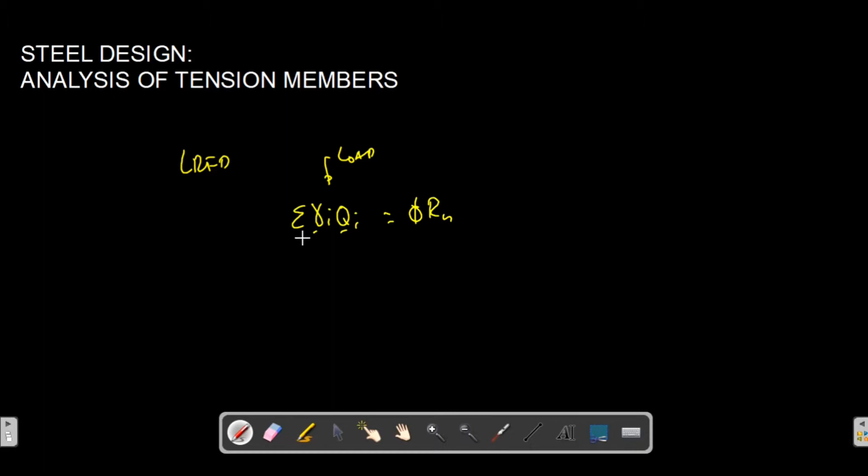This is the strength part for the structural steel member. Here we have a resistance factor and the nominal strength. Since tension is an axial force usually denoted with P, our concern in this lecture on analysis of tension members is this strength part, specifically the nominal strength part, and the symbol we'll use for tension strength now is Pn.

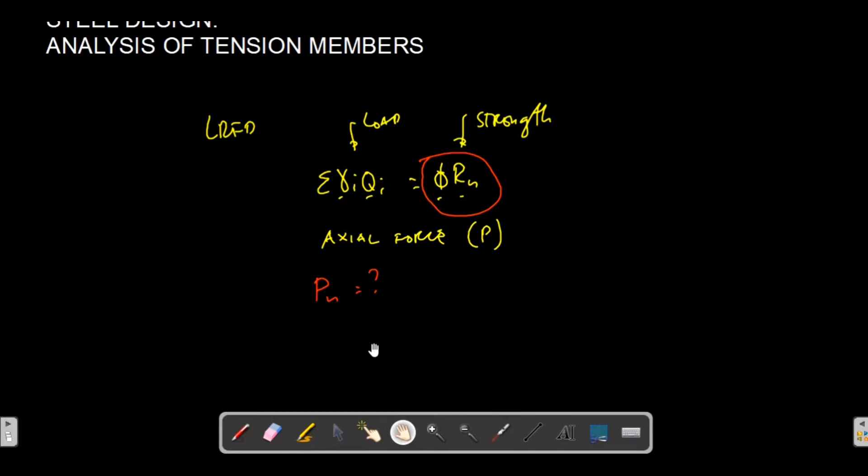So this is our concern now - we want to know the strength of our structural member, which in this case is a tension member made of steel. We have two criteria to determine the actual strength of a structural member.

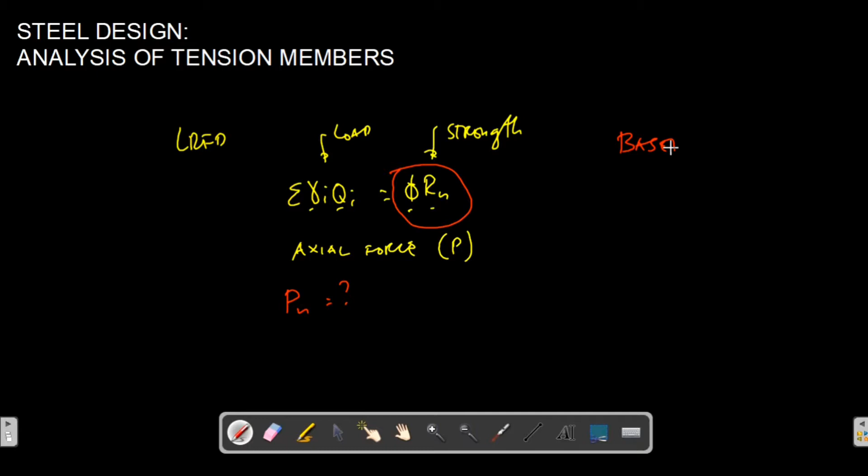First, based on the gross area Ag. Our equation here is: Pn equals resistance factor times Fy times Ag. This is our equation when we use gross area.

The resistance factor here is equal to 0.90. Fy is the yield strength, and Ag is the gross cross-sectional area. We already know about gross area - we discussed that in our previous lecture.

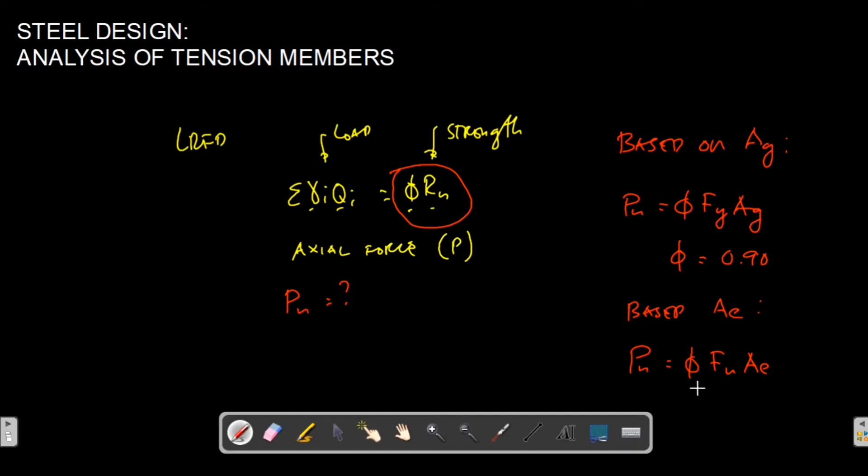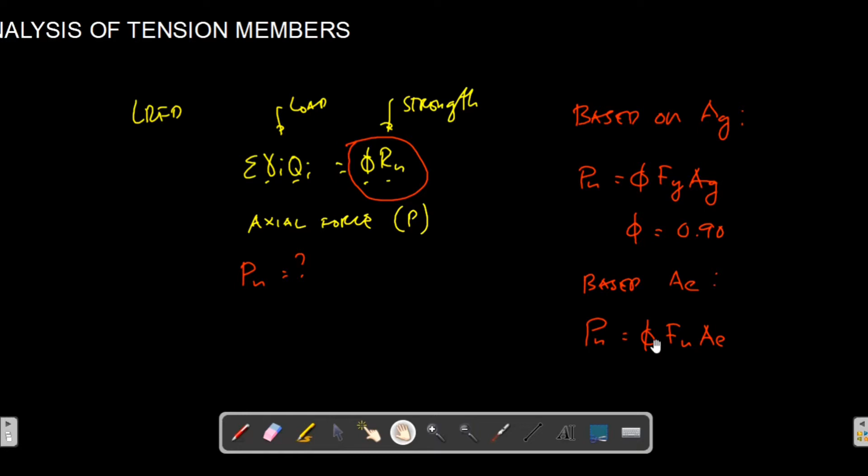So there's a range, and we use the minimum. The resistance factor for the effective net area criterion is equal to 0.75. These are the things we need to remember.

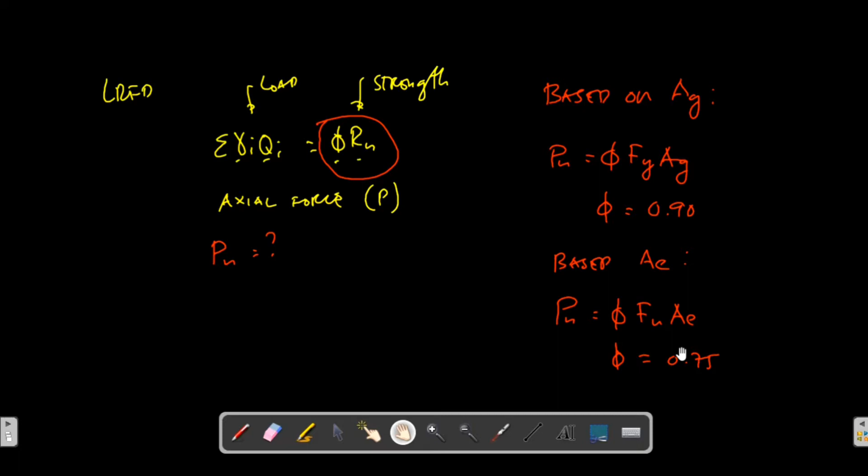We have a sample problem: Determine the tensile strength of a W10 by 49 in A36 steel if the two flanges and the web are all welded to the supporting member.

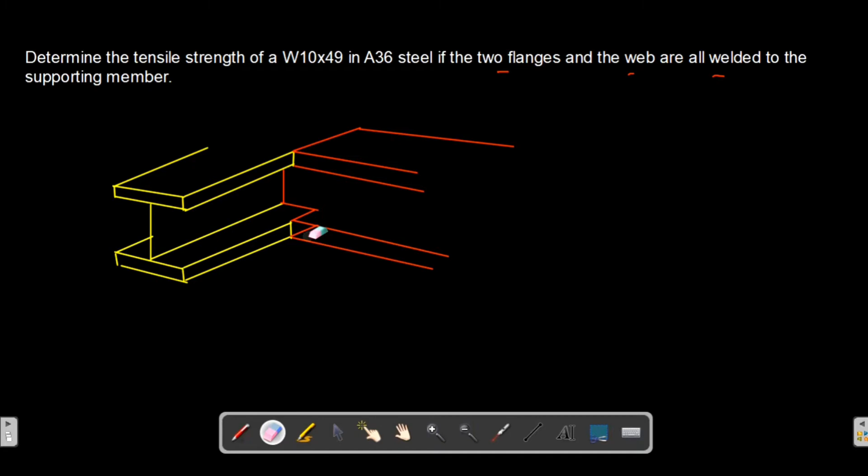Ganun pala dapat, no? So, i-erase natin to. Erase natin yung dito. Okay? So, erase. Then yun. Parang ganito. Okay.

Ito bali yung isang member natin, member 1, tapos ito naman yung member 2. Ibig sabihin, yung flange dito, tsaka yung web, naka-weld yan. Yung weld natin, didrawing lang natin yung weld na part. Ito naka-weld yan, no?

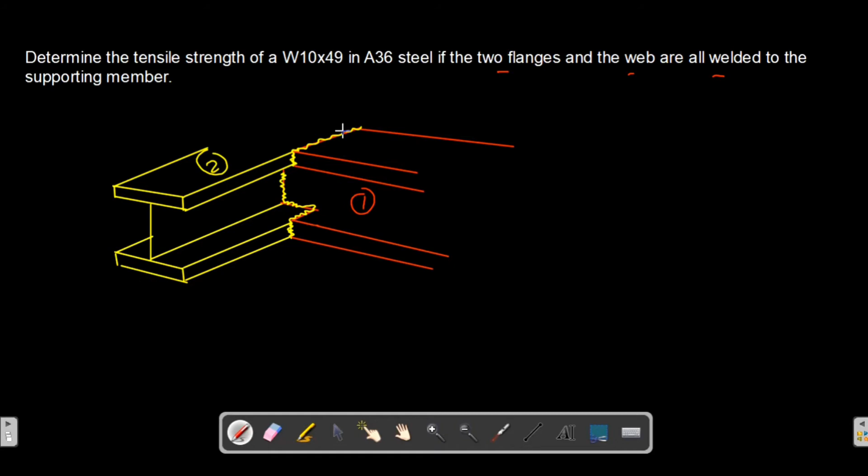Naka-welding lahat yan. So, walang bolt, nasa ilalim din, naka-weld, tsaka ito. So, lahat ng area, o lahat ng cross-section na dumikit sa kabilang support, o kabilang member, naka-weld yan lahat. Ibig sabihin, gross cross-sectional area lang yung mako-compute natin dito, kasi wala namang butas, tapos naka-weld lahat.

So, yung effective area dito, tsaka gross area, equal lang. We have AG is equal to AE, kasi lahat naka-weld din. So yan para sa areas natin.

Dito naman sa W10 natin, meron tayong mga tables na nagbibigay ng mga cross-sectional or dimension na data. Dito sa engineering toolbox, marami actually dito na mga designation, tapos pwede kang makapili ng metric units or imperial. Since yung material natin is A36, pwede na rin na i-express natin in terms ng English units, okay?

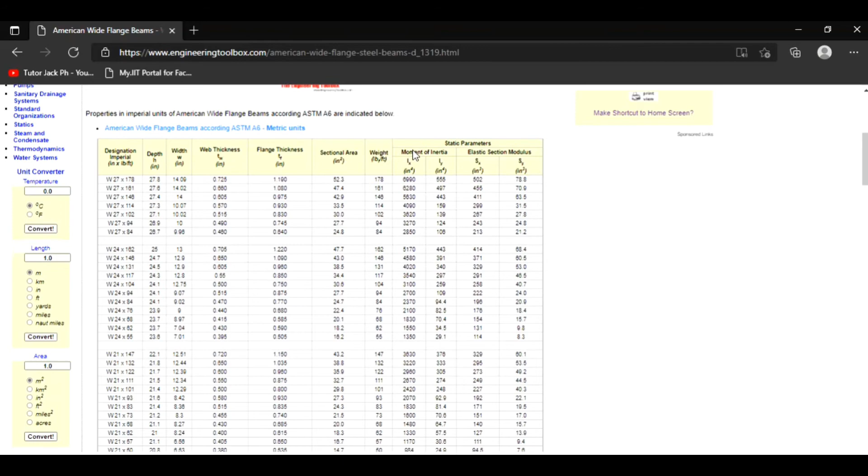So W, hanapin natin yung W. By the way, ito yung mga content ng table na to. Meron depth, may width, web thickness, flange thickness, tapos meron ng sectional na area, okay? Tapos weight. So, hanapin natin dito yung W10 by 49, yung binigay na problem natin.

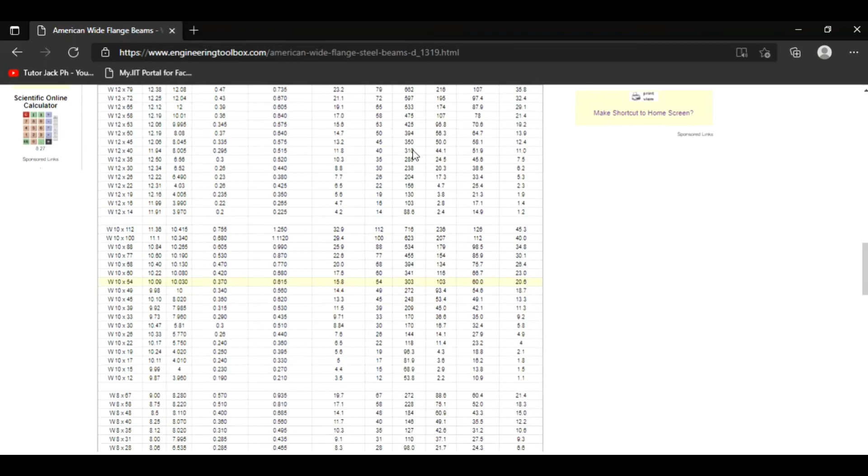So, that's W10 by 49. Yung cross-sectional area niya dito is 14.4. Tama ba yan? That's cross-sectional area. So, yung cross-sectional area natin, we have AG equals AE equals 14.4 inches square. Okay, so solve na tayo sa area natin.

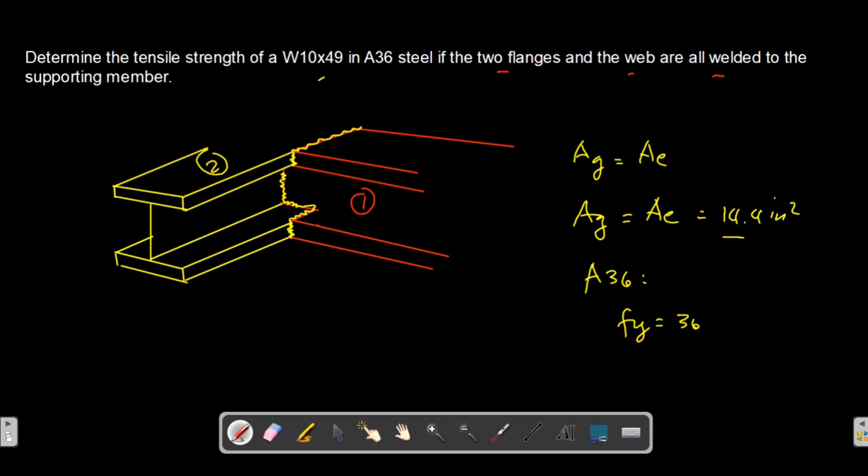For A36 steel natin, meron tayong Fy niyan, which is equivalent to 36 KSI, kasi nga kaya siya tinawag na A36 steel. And then, we have Fu, which is yung minimum niya is 58 KSI. Makikita natin to sa ASTM standard. Yung mga values na to, nasa ASTM A36, which is the specification for carbon structural steel. Fy equals 36 and Fu equals 58 KSI, yan yung mga minimum values natin.

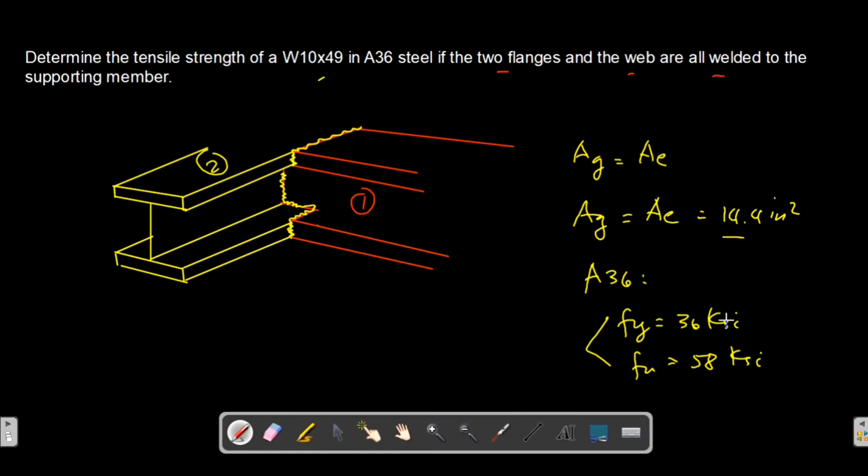Okay, isosolve natin. Meron tayong dalawang criteria na sinabi kanina. We have for gross area, AG equals 14.4 inches square. We have Pn is equivalent to resistance factor 0.9 times Fy na 36 kips per inches squared, times AG na 14.4 inches squared.

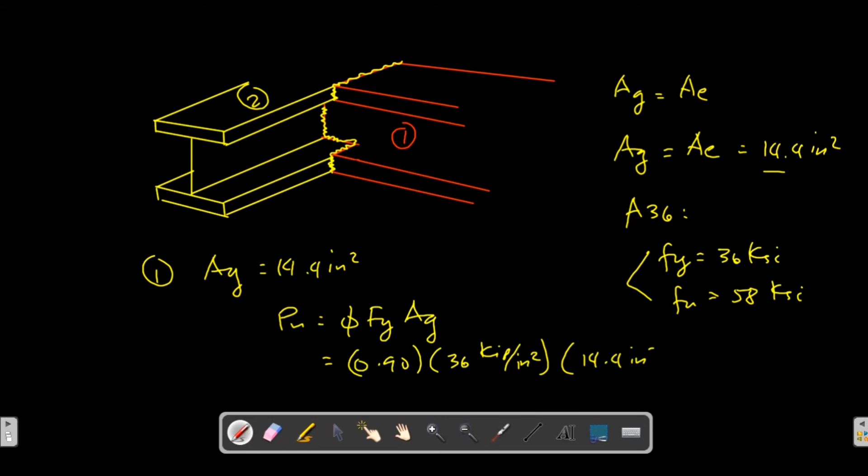Okay, so we have Pn equals, dito tayo sa calculator natin, 0.9 times 36 times 14.4. That's 466.56, makakancel yung inches squared, ang matitira natin dito is kips na lang. So that's 467 kips. Yan yung Pn natin based sa gross area.

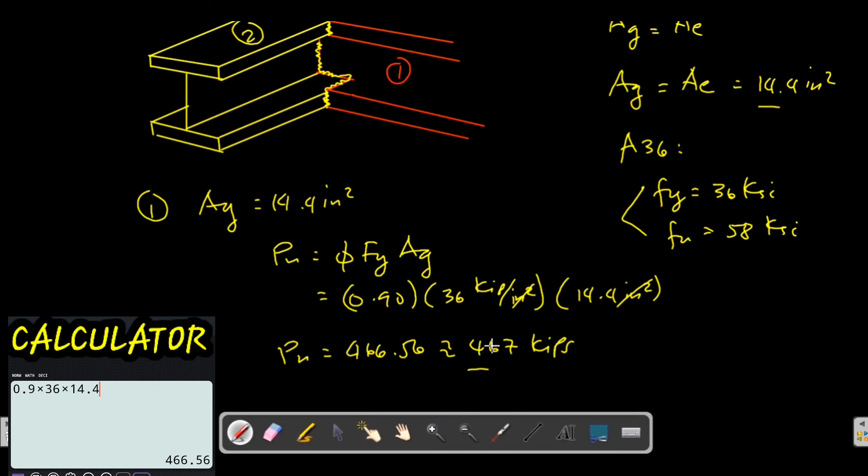Based naman sa effective net area, we have AE is equal to 14.4 inches squared. So that's Pn equals resistance factor 0.75 times Fu times AE, which is 0.75 times 58 times 14.4 kips per inch squared times inches squared. And then we have Pn is equivalent to 626.4, or roughly 626 kips.

Okay, so again, nakukunin natin dito yung minimum. Yung final answer natin dito, yung nominal strength ng structural member natin is yung 467. Bakit? Kasi pag ito yung pipiliin natin, ibig sabihin, nag-fail na siya dito sa gross area in terms ng isa sa condition natin. So at least kung ito yung pipiliin natin, safe siya sa dalawa, kasi yun sa in terms of effective area na fracture, mas malaki pa yung strength niya. So ito yung mas critical na strength value na 467 kips.

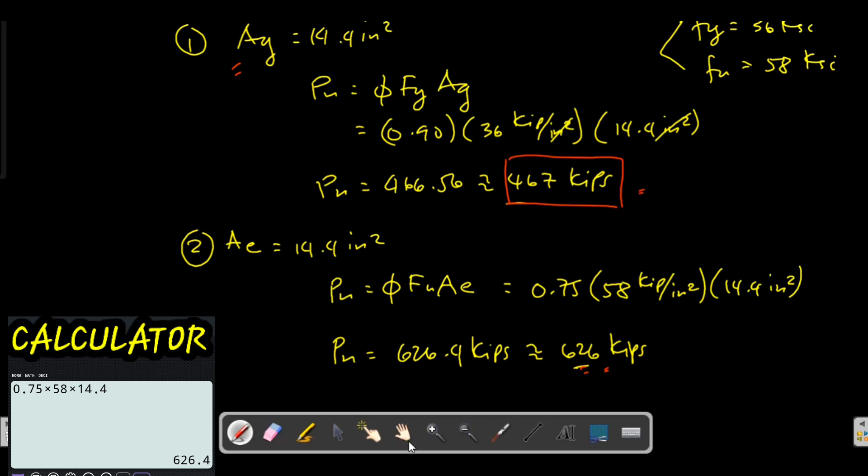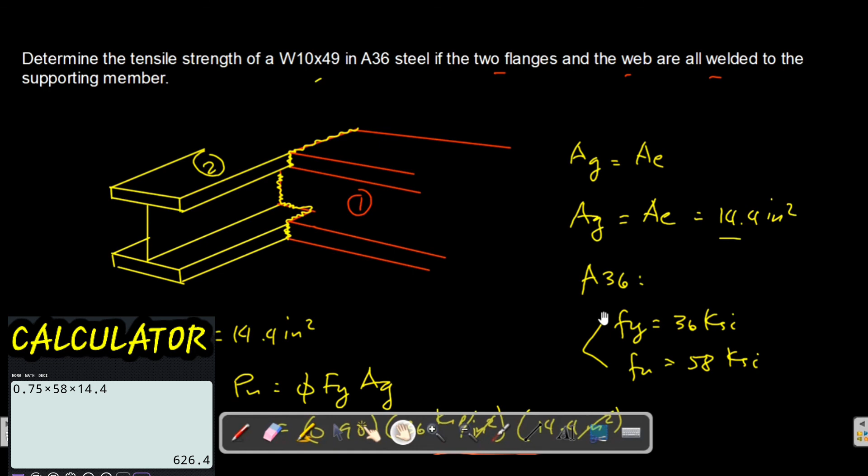So ganun na yung pag-check ng nominal strength ng isang tension steel member. Gross area and effective net area in terms of fracture. Ang gross is in terms of yield strength, at ang effective ay in terms of ultimate strength. So I think yun na yun para sa video na to. Thank you ulit for watching, and see you ulit sa next na sample problem natin for this topic.